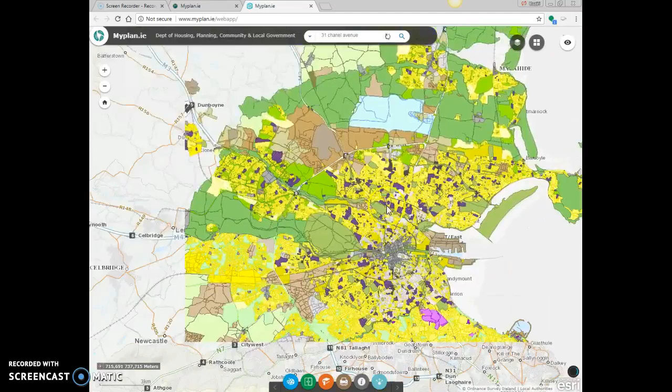I can then put in the address, or I can zoom in on an area depending on what I want to do, and it should zoom in on the area. If it doesn't, what I'm more likely to do is just zoom in on the area I'm looking for. I'm going to use the same area I looked at in the project previously.

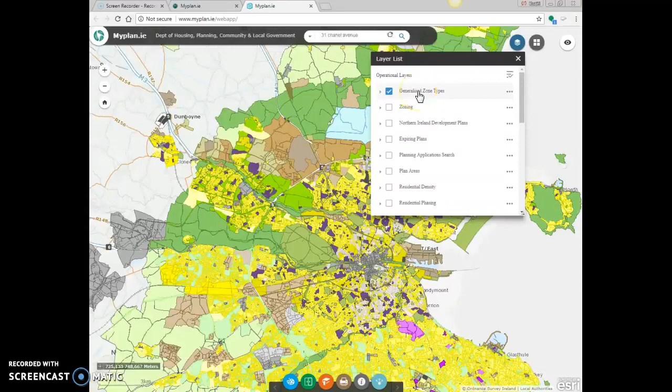You can see here around Dublin they have layers created, so if you come in here you'll see it's generalised zone types. For this exercise I'm going to click those off and bring myself into this area here, which was this street, and the house I was looking at was this one here.

So what we want to do is bring that from here into my AutoCAD drawing.

In order to do that, I'm going to use my snipping tool. If I come down to my desktop here, go to snipping tool. If you can't find it, just type it in, SNIP, and you'll see it click up. Click on that, and it should appear on the screen. You can see it's appeared on the screen.

I'm going to go new and take an image of it. Now the important thing to remember is when I take the image, I need to bring this scale bar in. If you look down here, you can see the scale bar, which is a 30 meter scale bar. I need to bring that in if I want to scale it up when I'm in AutoCAD, so I'll catch that there and take that much of the image with me.

Now I know that that area in there is the property. I'm going to go to file and save this as a JPEG for the moment, just put it on my desktop, press save, and I've saved that image now.

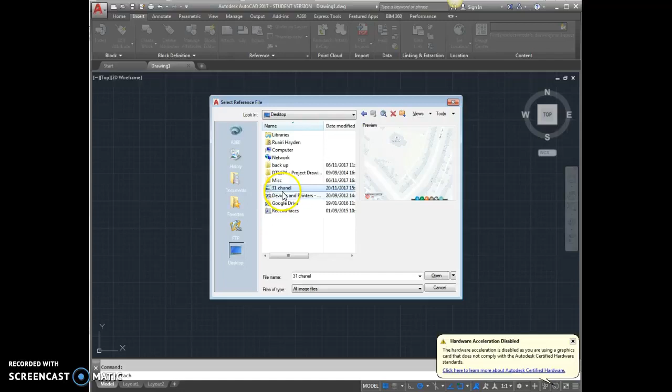It'll come in here and ask me to select the file that I want. So I go into my desktop where 31 Chanel is the one that I put in, click on open, and now this is important here - the file name is here.

I'm going to give it no path. The insertion point I'll specify on the screen, and the scale I will leave in, I'll specify on the screen. The rotation I'm going to leave as 0, and then I just click OK.

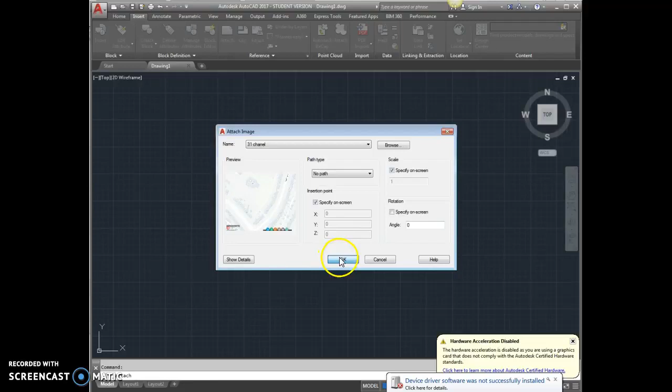And I can click 2 points on the screen. Okay, now that's the image gone in, and what I now need to do is use this scale to scale up the image.

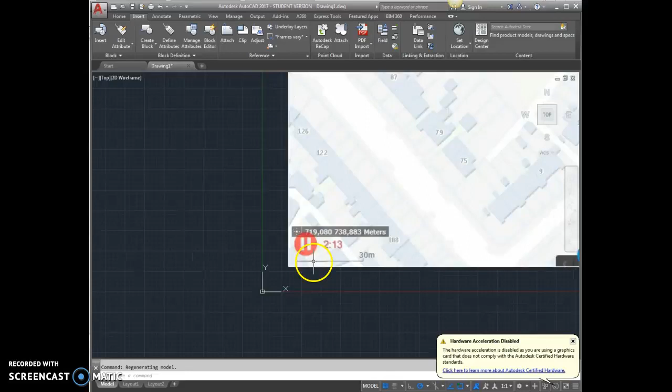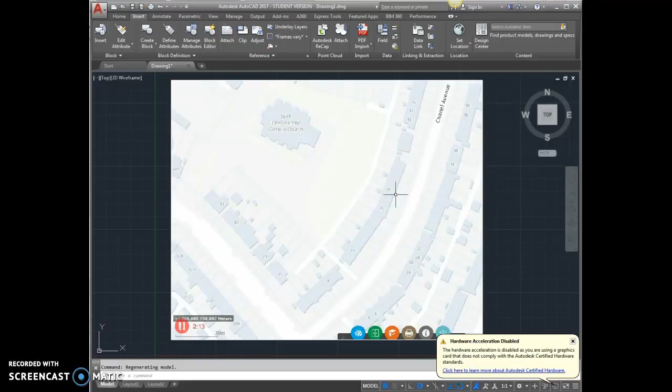Now the accuracy on this will be questionable in that it will only be as good as the sketching that you do here. So I would only be using this for looking for kind of a generalized idea as to areas of site and stuff. I wouldn't be looking at using it for very, very accurate work.

So in order to scale, what I need to do is scale this line so that the line is actually 30 meters. So in order to do that, I'm going to create a new layer.

Go to layer properties, and I'm going to create a layer called scale. Go new layer, I'm going to call this scale, and I'm going to make it a different color. I'm going to make it green. Click OK.

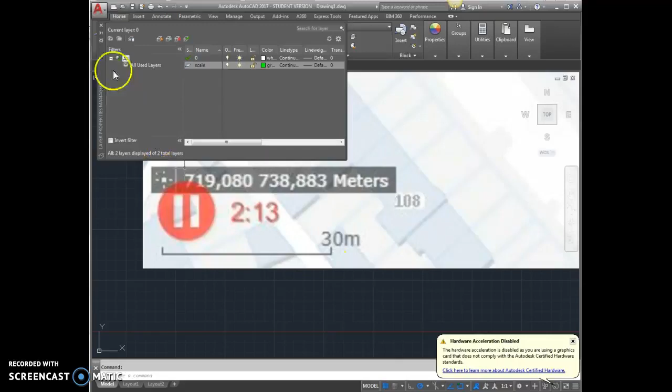Close that. Click on line, and draw a line along here. I'm going to draw 30 meters. And you can see there, it's gone out beyond the line.

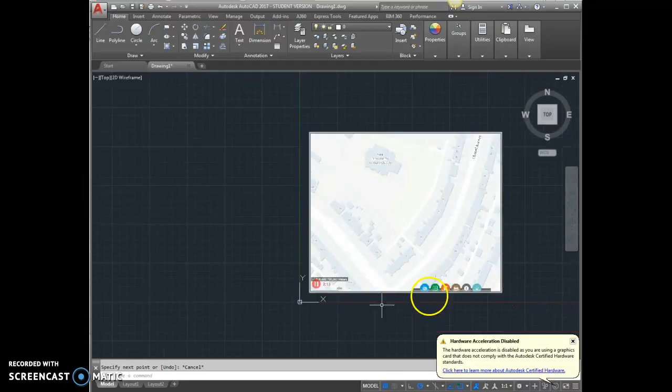So I'm going to make that my scale line. And on top of that, I'm going to draw a line from here, which is to the length of my scale bar, and bring it through to say there. And you can see there, that's sitting as the length.

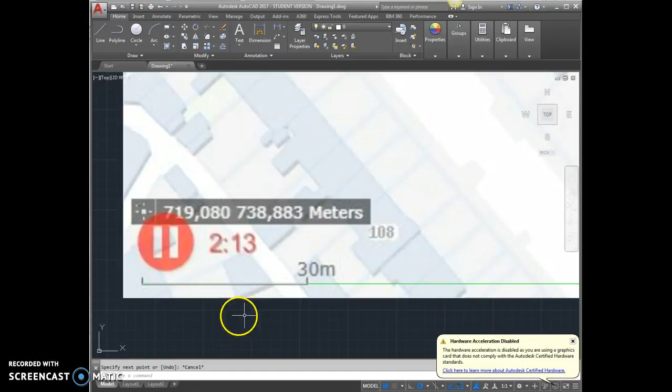Now what I need to do is scale the drawing to the size of the green line, so that my scale bar is actually 30 meters. So in order to do that, I'll be scaling my white line and my image up to the size of the green line. And how you go about doing that is you click on scale.

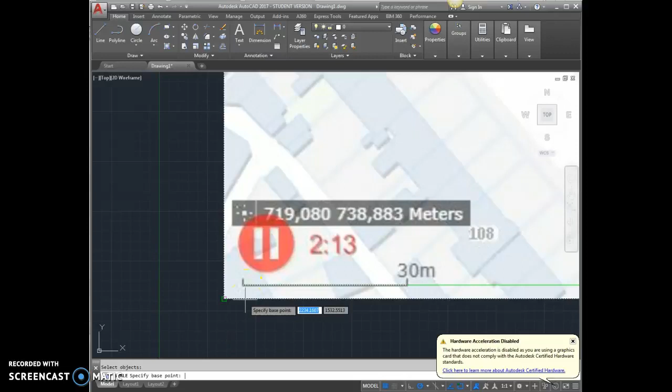You click on the drawing, you click on the white line, enter, you specify a base point. Sorry, I'll do that again. So if I click on scale, select objects, I'm going to select that object there and that object there. So it's two objects. And then it says specify base point.

So this is my base point. Now this is the important bit here. It says scale factor, or copy, or reference. And here what we do is we use reference. It says specify reference length.

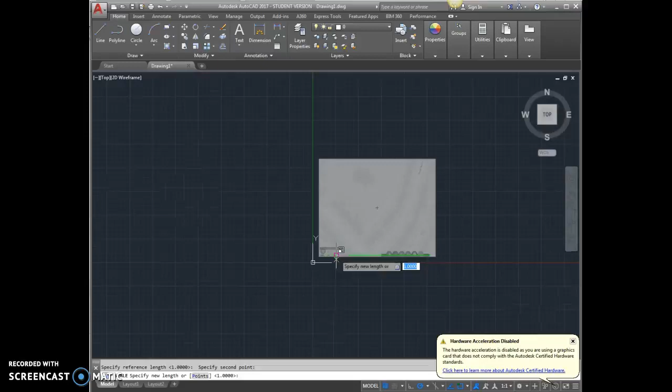So my reference length is from there through to there, and my new length is down to the end of the green line. Now that drawing, or that map, is in to as close a scale as I would use for what I'm doing here.

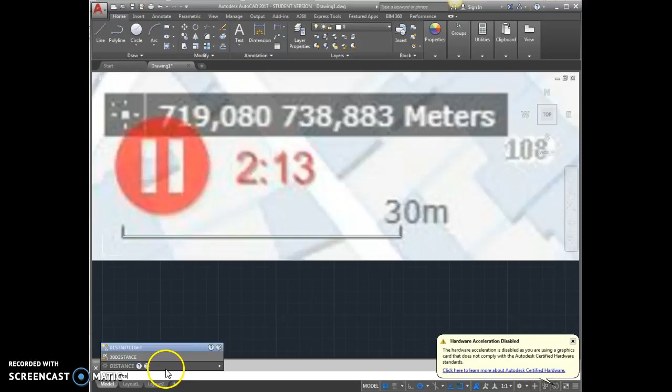And in order to check that, I could take a dimension on that line. So if I just put in distance, I'll click on distance. I can go, I'll take a dimension, and I just go from there to there.

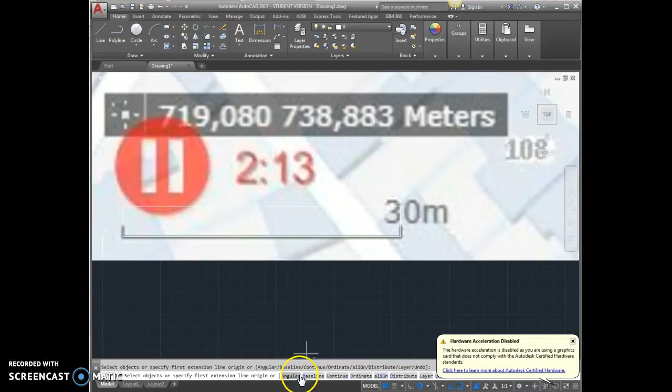And if I zoom in on this here, you'll see that it's 30 meters. So that's the distance from there to there.

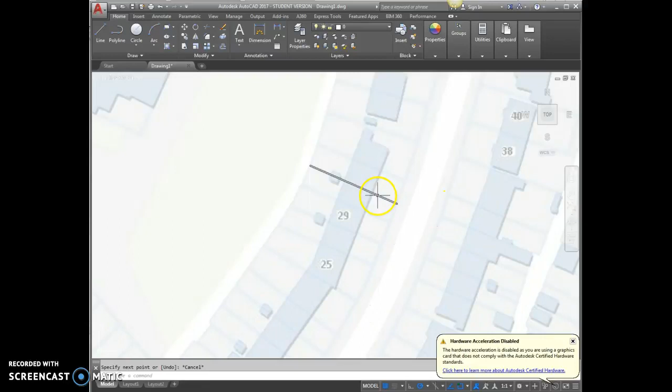So again, if I wanted to find out what the length of the site is there, what I could do is come in here. This is number 29. Draw a line from here through to here. I'm just going to change that to my scale there just for the moment. And then I could take a distance on that using a line.

And I can just zoom in on that and see it's 26 meters. Okay.